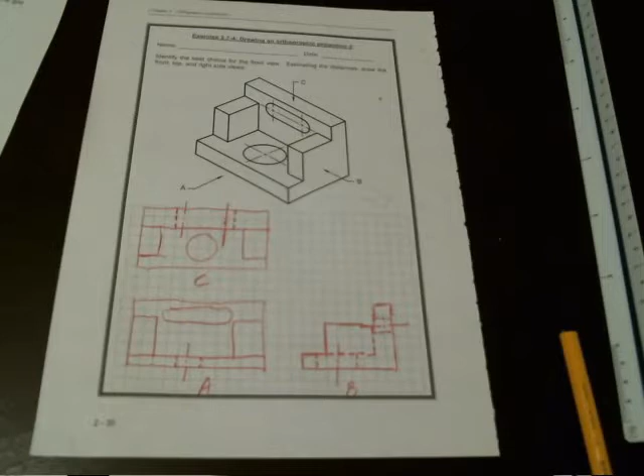This is a video on multi-view drawings. For these, it's actually just going to be sketching - you're not going to be using any straight edge. As you can see by my example in red pencil, I just did it by hand. You want to try to keep lines as straight as you can, but if not, that doesn't take away from the drawing. I put this one on here so if my students want to stop and take a look at it as a reference point.

Here's your A view, which is your front view, down here. C view is the top view looking straight down, and then of course B is the side view.

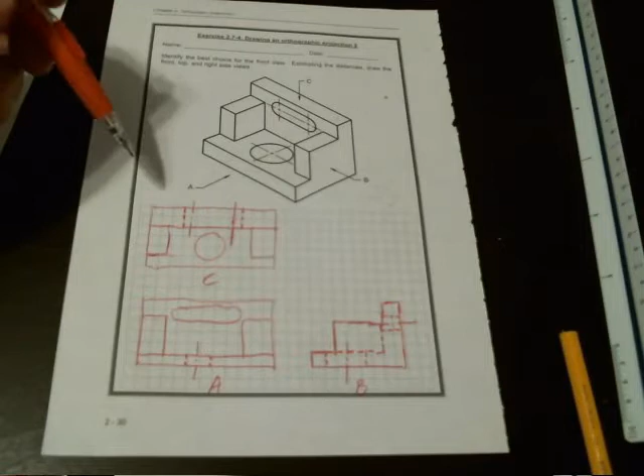Understanding that you're going to have three types of lines: you have your solid lines, which mean that is an edge that you can see. A small dash line is a hidden line, meaning it is there, you just can't see it from that view, so it is hidden from sight.

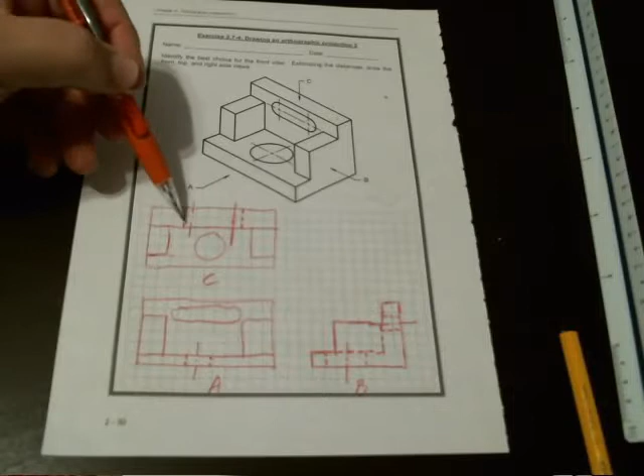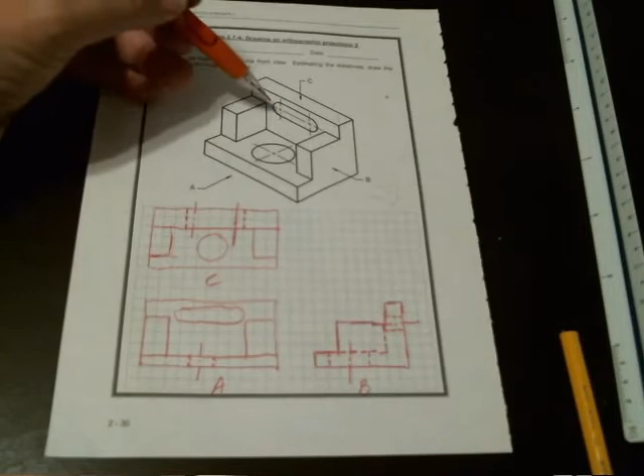This one right here, as an example, these two dash lines - this is the top view I'm looking at. You can't see this opening here, so the dash lines are for the ends of these, where these arcs are. And then the center lines let you know that this is circular. If I didn't have those center lines, it would mean these would be squared off.

So I wanted to show this before I go into sketching one. If you have any questions on this, feel free to email me. But I'd like to do one and explain it to you while I'm doing it. Hopefully this camera will work for me.

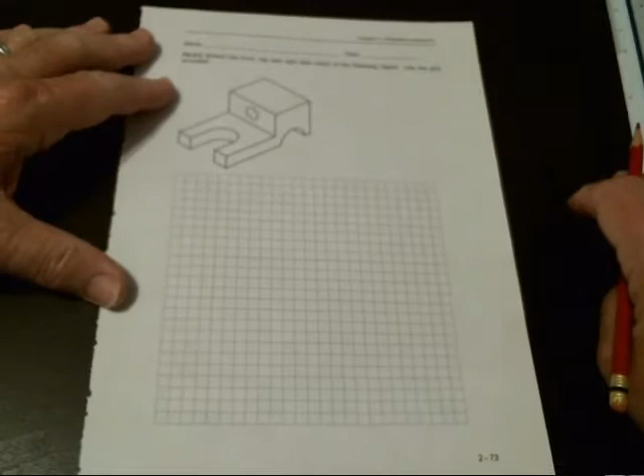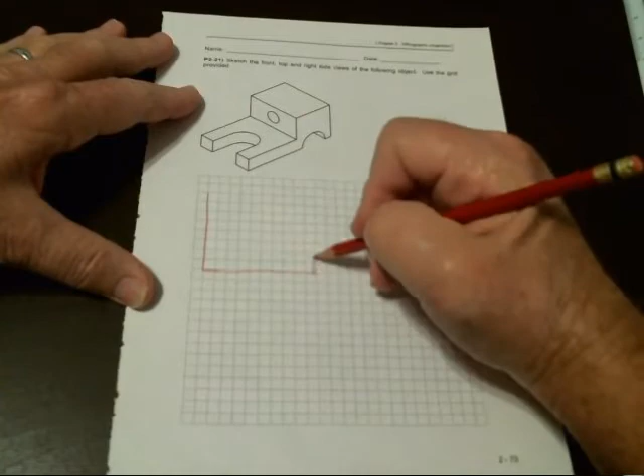The first thing I'm going to do is the top view. So seeing we've got this side over here - and again, this isn't going to be to any kind of scale, I just want to sketch it to there. Then I'm going to come over all the way, then go along this side, and move this up a little bit more. I want to draw, this is the top view of that.

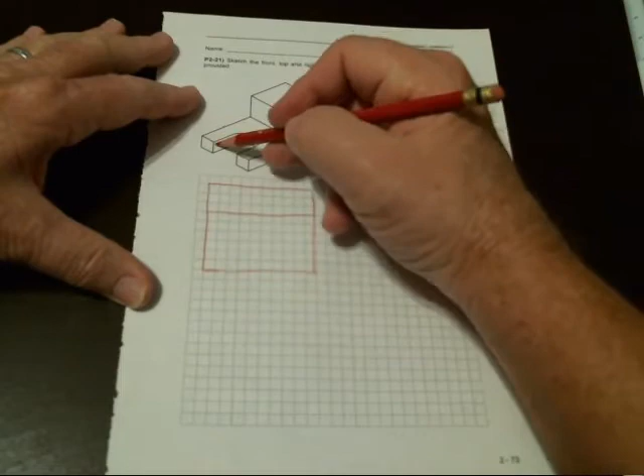Now the first thing is we see this edge, so looking downward, I can see that edge. I'm just going to draw a line across there. And I can see this edge right here - looking down, I can actually draw that like that. And technically we don't use that there, let me get rid of that.

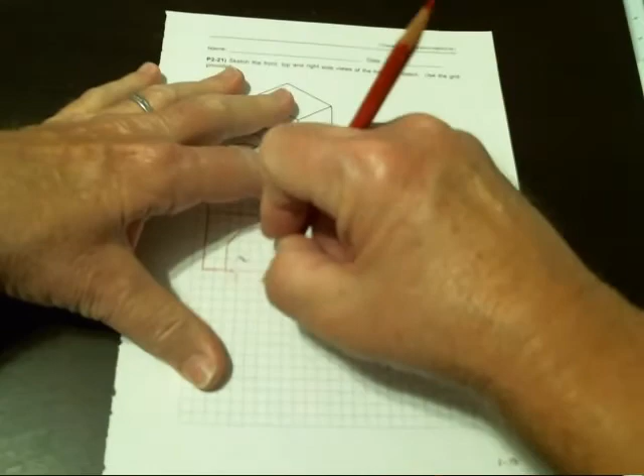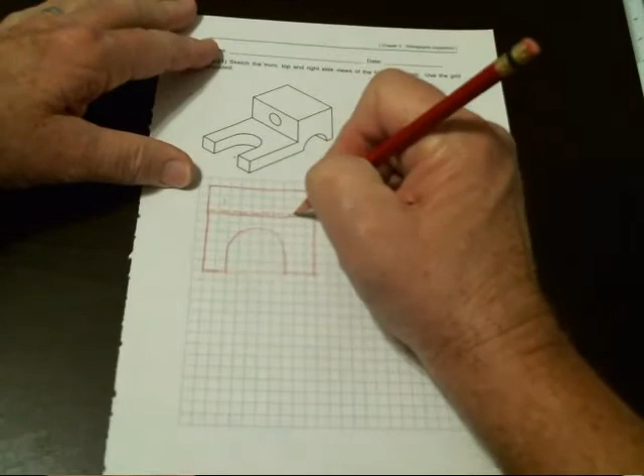So that's what we're looking at from the top. Now this archway, we can't see that, so I'm just going to say this is just in a little bit. I'm going to put a dashed line because I can't see it from the top, and then do this other dashed line for this other side. And then of course a center line going through it, letting the viewer know that this is arced.

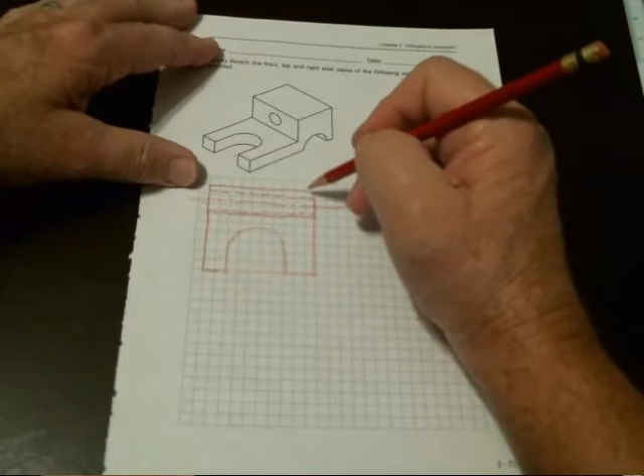Now still looking down, I can't see this circle, and that's just within this ledge. So I would draw a dashed line there - this is for the circle - and then draw a center line through there. That would get me the top view.

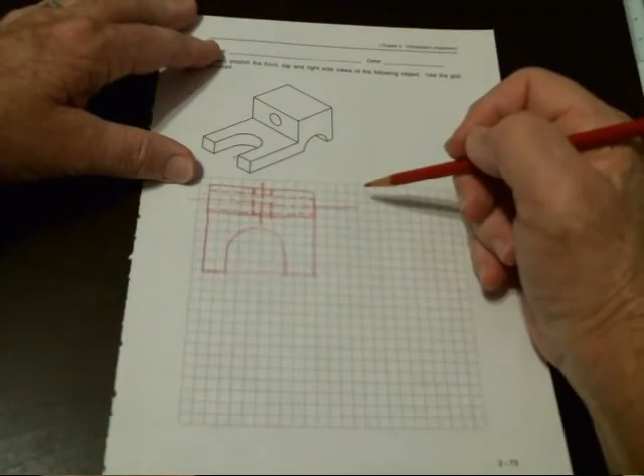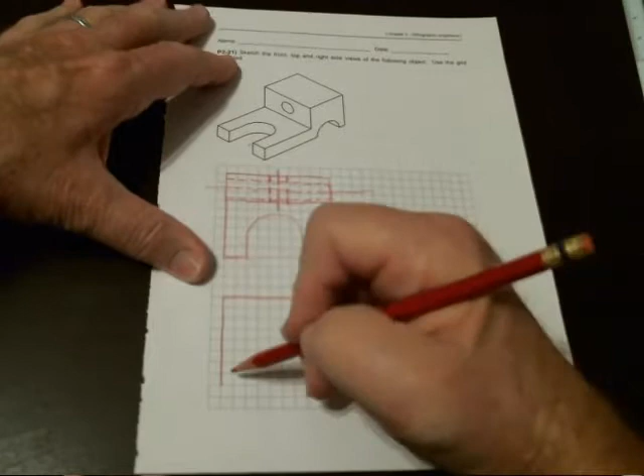Now, when I look at the front view, understanding this is all the same object, the front view has to be the same width as the top view. So I'm just going to come over here and draw this down like this, then draw this over. Notice I'm trying to keep my lines straight - obviously sometimes they go a little crooked, but that's okay. This is a front view.

Now we've got this ledge right here - actually, we'll do this first one here. So we know that that's right there. Now for these edges, we can come and draw, extend these down.

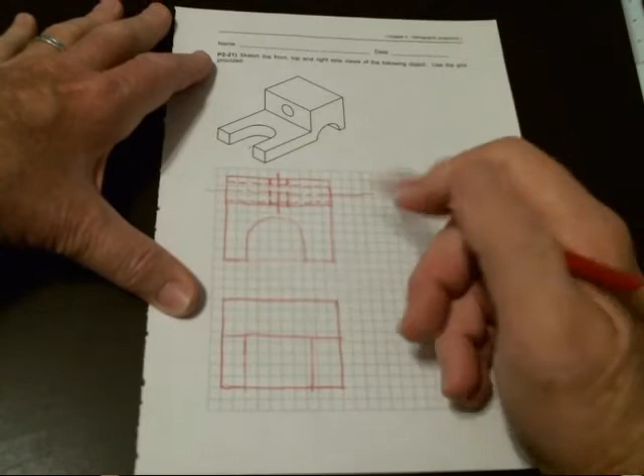That's a little taller than I want it, but you'll get the idea. Then I've got my circle here.

Again, I can't see this on the back side, all I can see is this top. I cannot see that top line, so I'll just do a little dash along there like that. And then, of course, a center line to show that it is circular. This is a little distorted, but again, the idea is just to sketch it up and have the lines in the correct position.

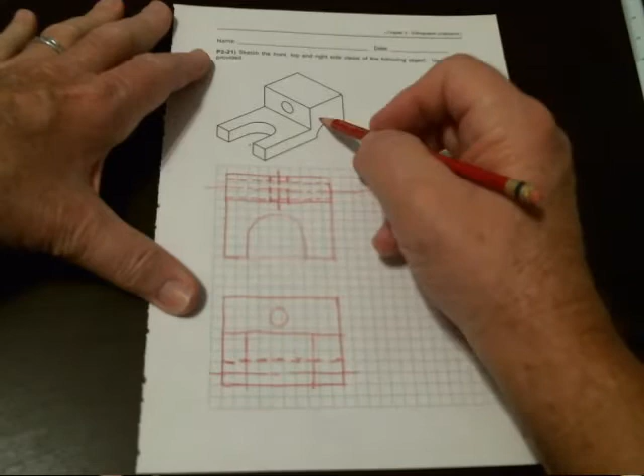Now, the last thing that I have is this view, the side view, which I'm going to—if this is the front view, the side view has to be the same height.

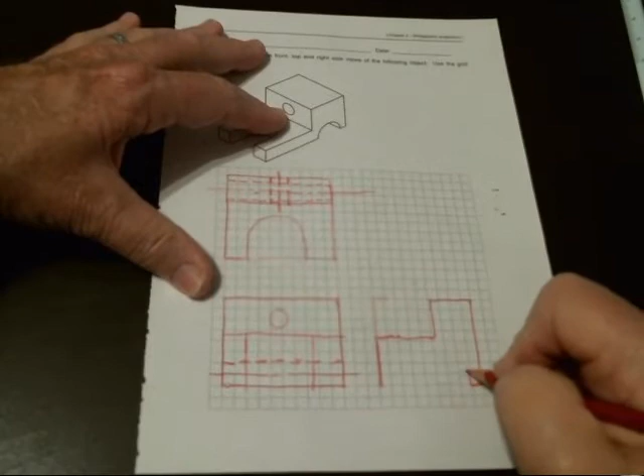So I'm going to make sure that line is like that. I'm going to go ahead and—already making a mistake here. So this is the side view. And go over like that, come down, go over, do the arc, bring this over to here.

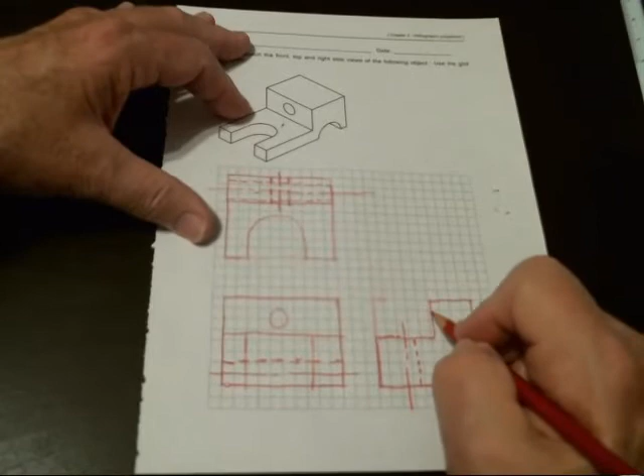Okay, so the first thing that I can't see from the side is where this curve is. So from the edge of where that curve would be, I would have a dash line. And that's really from this point right here. And then, of course, a center line to let you know that that's arced. And then right up here, this is coming straight across from this circle. And this is drawing that edge.

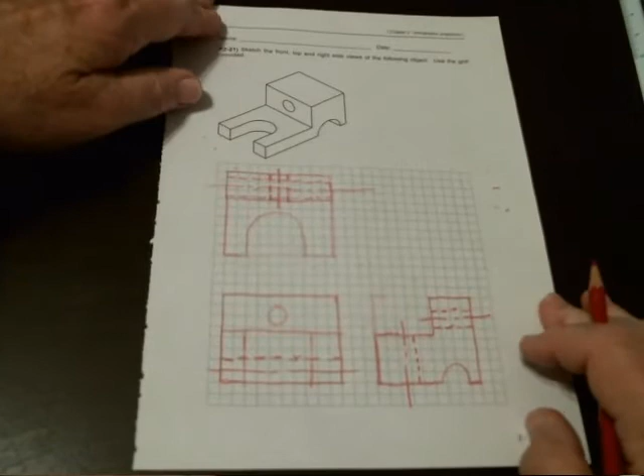Okay, so that is sketching up a multi-view drawing. And again, mine's off a little bit. For right now, all I want you to do is get the idea of how the multi-view drawings go. If you're still struggling with it, I want to catch it while you're sketching it, not while you're trying to do it to an exact measurement.

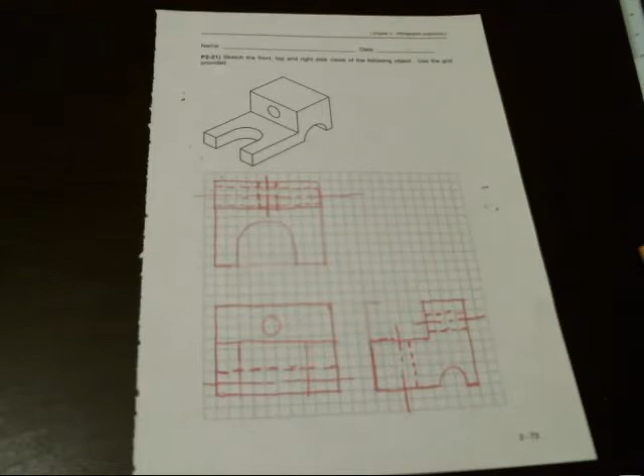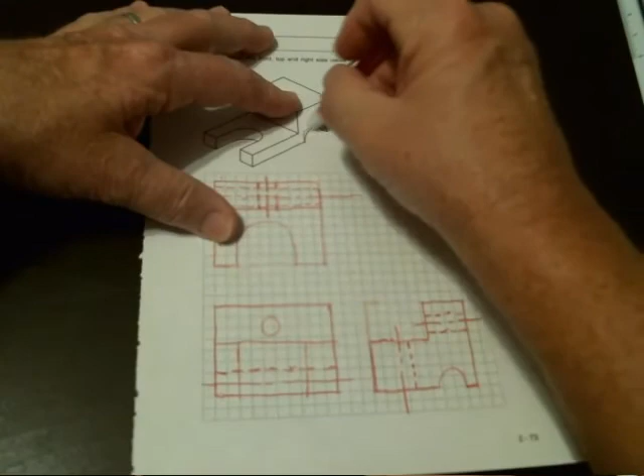So this is what I'm expecting on your next assignments—work on it, sketch it up, and remember that if this had been squared, more like a shaft, then this center line and this center line would go away, because that would let me know that that's squared off. But as we can see, it's not squared off.

Okay, so take a look at that. I'm going to be doing another video where it's more exact, but for the exercises that I'm giving you right now, this is the video to watch.

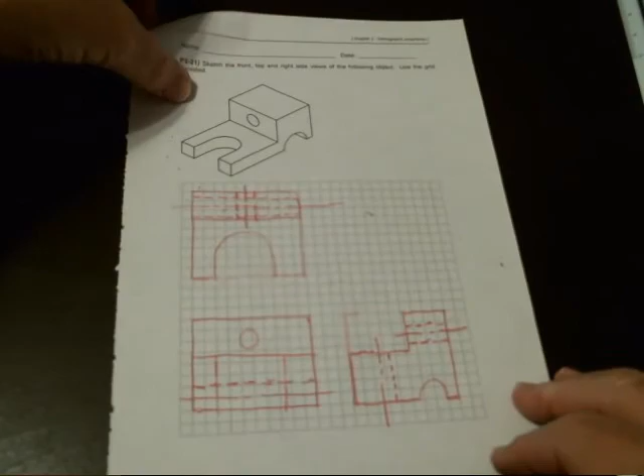Also, just as a side note, I don't want y'all to forget about these, your two scales, okay, not rulers. And as I've told other students, if you want to practice these, just come like this and draw different lengths of lines. You can do as many as you want.

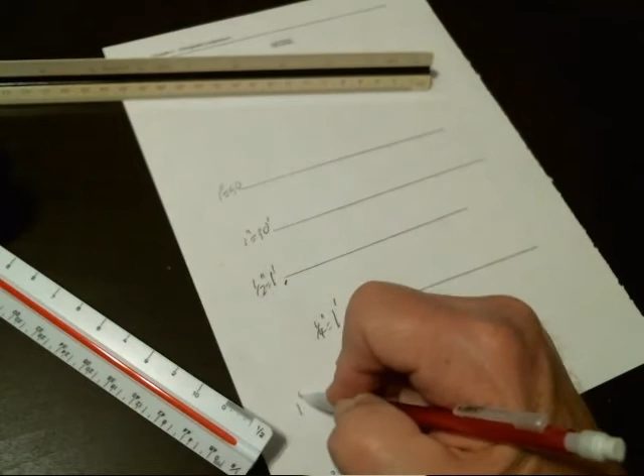Then find you a scale. You know, this could be 1 inch equals 50, 1 inch equals 30. And then you can come over here to the architectural and do 1/2 inch equals a foot, or 1/4 inch equals a foot, and say 1 inch equals 20 feet. So this would be engineer, architect, architect, engineer, engineer, and you measure it.

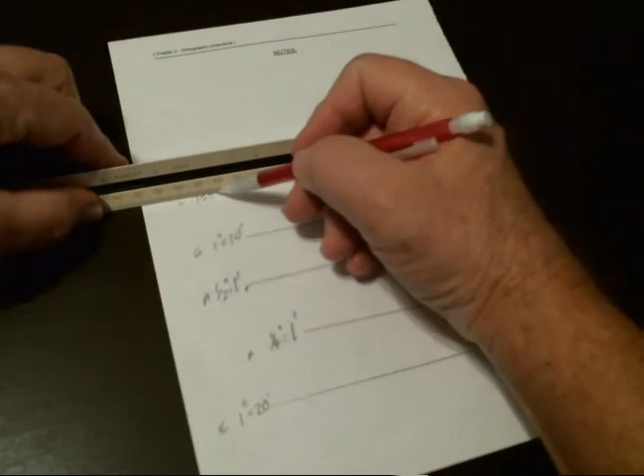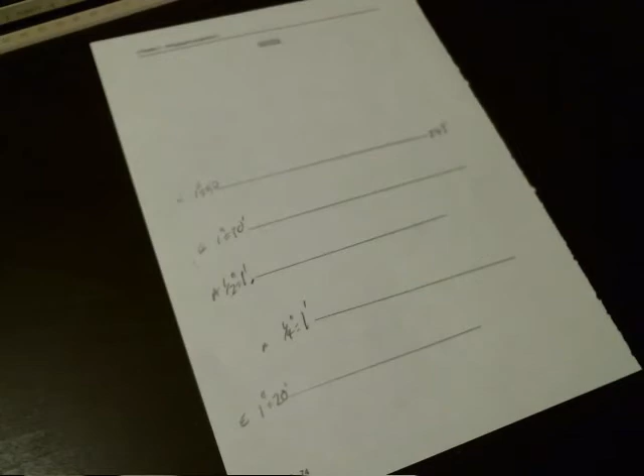Just go ahead and grab your scale, come down there and say, okay, this is 243 feet. You do a sheet of those, take a picture of it and send it to me. That's not part of your assignments, but it's part of the practicing to learn these two scales, because you will be using these in the industry, which I know I keep stressing.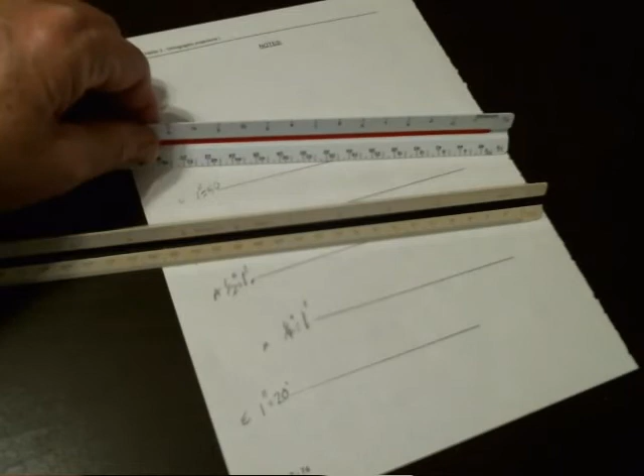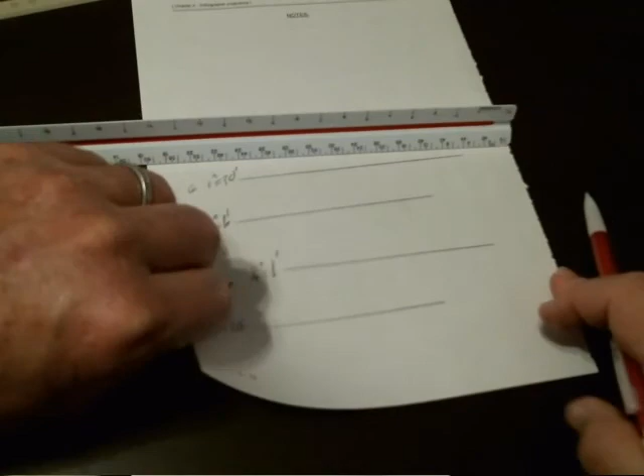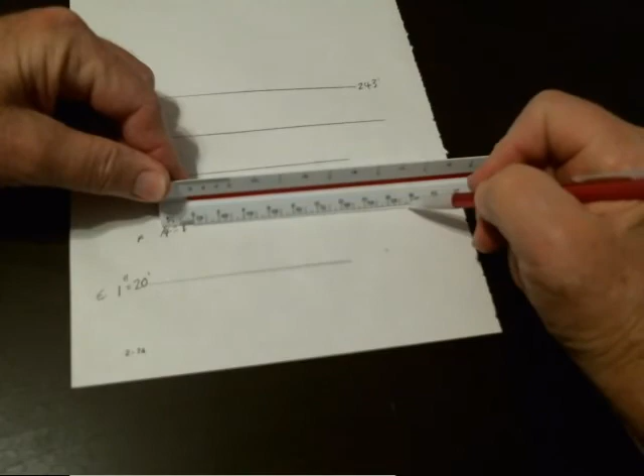And it's very important that you know those, that by the end of this class you're able to grab a scale and go, okay, here it is right here, here's a 1/4 inch, and I know that that's 16—move this down, it's 17 feet, 7 inches. That's how fast I want you to be able to do it by the time this course is over.

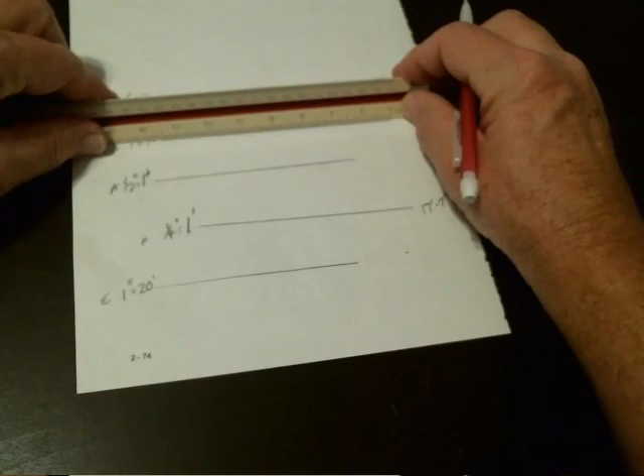Come over here and grab a scale, engineer scale, 1 to 30. Come over here and measure it. That's 150 feet. Okay, so practice these.

Also, work on your assignments where you're just going to sketch. And that concludes this video. Thank you.